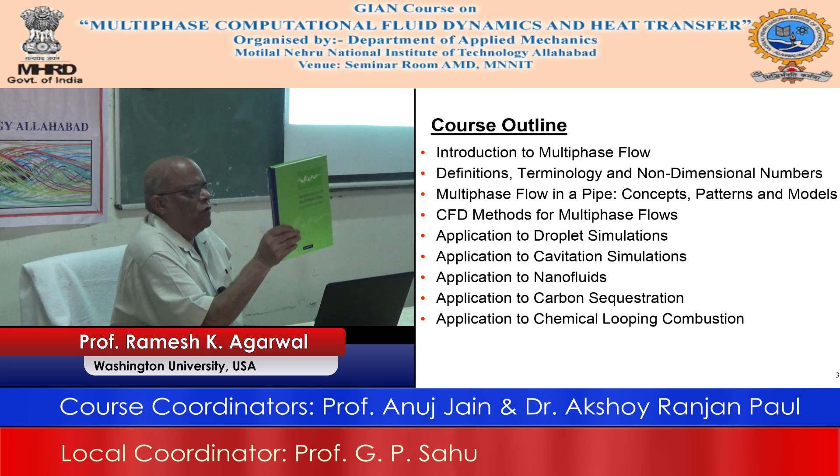Okay, so Christopher Brennen, he is a famous person from Caltech, and I think he retired many years ago. But this is the book. One thing I want to caution you is that if you want to learn about droplets, this is the best book, and if you want to give a course in droplets, this is a very good book. But if you want to learn level set, it does not have it.

And also if you want to learn about other things, which I think many of you may be interested in, and we will talk about that, the next application is cavitation. Cavitation is a very important phenomenon.

I want to know how many of you have heard of cavitation. So, quite a few of you have heard of cavitation.

Cavitation occurs in turbo machinery very commonly. There are lubrication devices in mechanical engineering like a hydroviscous device. There are so many places, hydrofoils. So what happens is that cavitation is nothing but the formation of small little bubbles. In turbo machinery, if you have cavitation, it causes erosion, it reduces the efficiency of the turbine, and so cavitation has been something people have worked on for a very long time.

So cavitation has two fluids, two phases. What are those two phases? One is those little gas bubbles, and the second is liquid, and most of the time what liquid is that? Water. Water, primarily water. Now maybe you can have other variations, but this is primarily the case, like in water turbines.

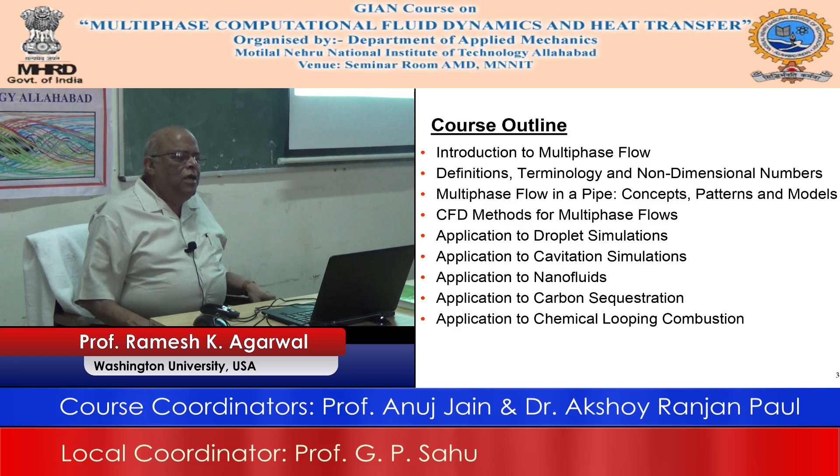So we will try to cover these 9 topics, and as I said, we will skip quite a bit, because the idea here is to give you less information in the presentation, but all the other information, if you want to follow it, you will have in the notes being handed out. On top of that, if you want more information, you can use that and get it from the literature, or you can contact me, because it is not possible to include everything.

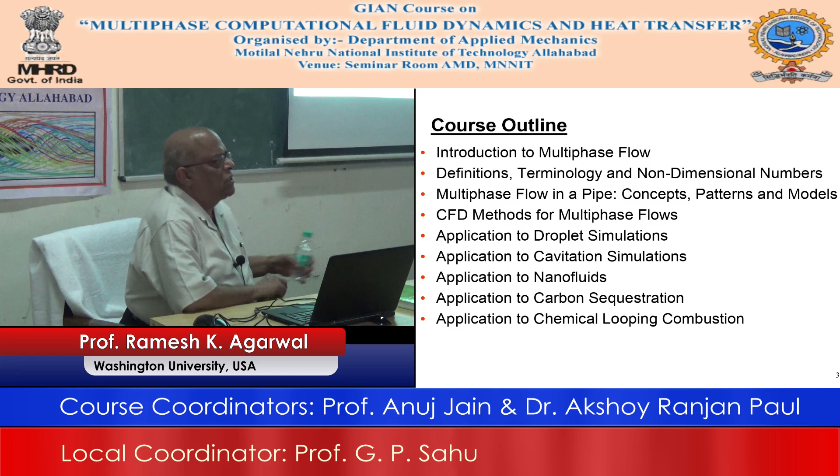But it turns out, luckily, that all the examples I gave you—the majority of the important flows—are two-phase flows. There are very few cases where the flow is relevant to three phases. And I think that is why all the books and other details you have are all about two-phase flows.

Have you come across any book related to the numerics of droplets other than the Fluent user guide? As I said, this fifth topic will have details of the numerics and how you deal with the interface—the level set method, some details of VOF. VOF is part of Fluent, so if you read the Fluent user guide, you can understand VOF, but it does not contain level set.

But once you get the information from here, then afterward if you use the Fluent guide, it will be much more helpful for you to understand that. Any other question or comment?

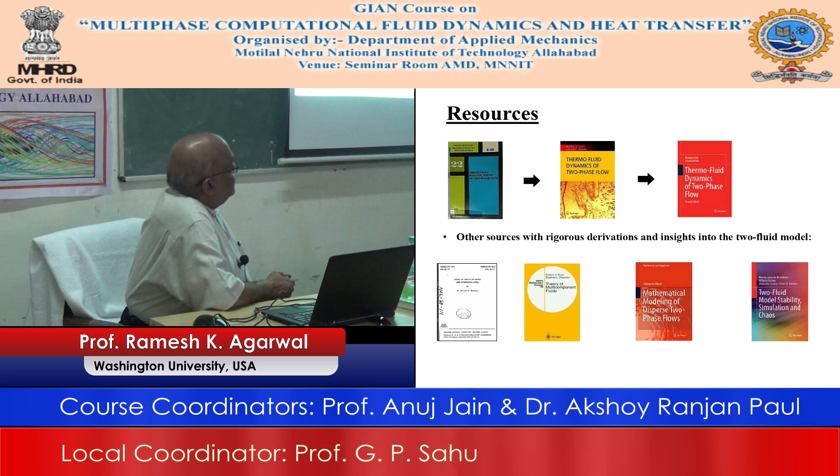Okay, so a lot of these things have the details that I have already discussed, so we can move a little bit faster. So what is a multiphase flow? As I already said, it consists of the other phases of material.

Material basically has two phases and three phases, that is gas, liquid and solid. But what can also happen is that in some problems the phase can change. So if you have initially water and some gas, but because of heat transfer the water can change phase to steam. So initially you may have water and steam, but later on you can have more steam and less water.

So the phase can change, and also it can happen that two phases react with each other. There are miscible liquids, they can mix, but there are immiscible liquids, like oil and water, that never mix. So the phases can change, like if you have salt water, for example the example I gave of sequestration, you have two phases, CO2 which is supercritical, a gaseous phase, then it becomes subcritical, it can turn into a liquid phase, and depending on the heat transfer, all kinds of changes can take place.

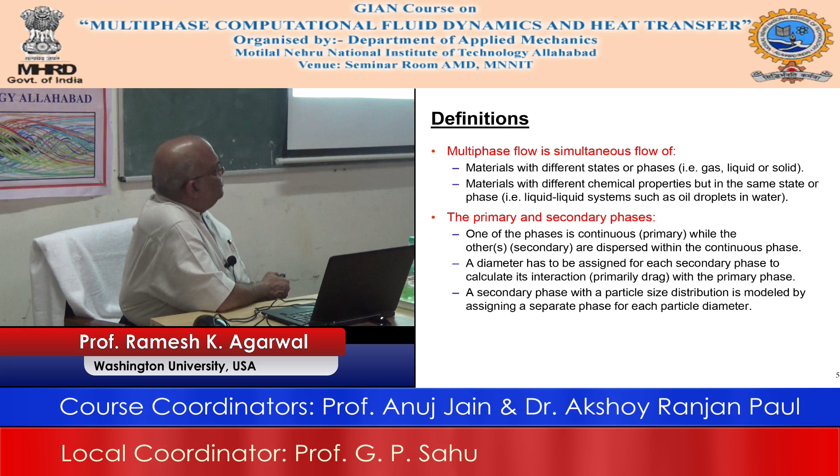Now, as I have already mentioned, because of the method you are going to use, what is the goal of a method, the goal of a physical problem? You want to formulate a physical problem with the simplest possible mathematics. But what is the characteristic of that mathematical formulation? You should capture every physics that you want. So if you can capture the physics of the entire problem in the simplest mathematical model, then you are a genius.

If you capture very simple physics with a very difficult mathematical framework, you are not only not a genius, you are not really applying your common sense. So our idea here is to capture the physics of multiphase flow, the important physics of multiphase flow, with the simplest model, and that is why a few minutes ago we had a discussion.

We said there is a method called DEM, a method called DPM, a method called two fluid model, a Euler-Euler model. Some of you who are more familiar with it, what do those mean? We will go over it. What it means is the status of these phases.

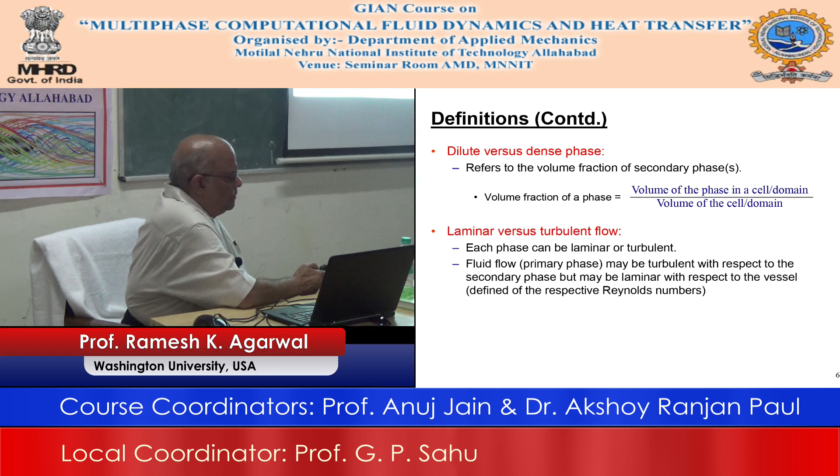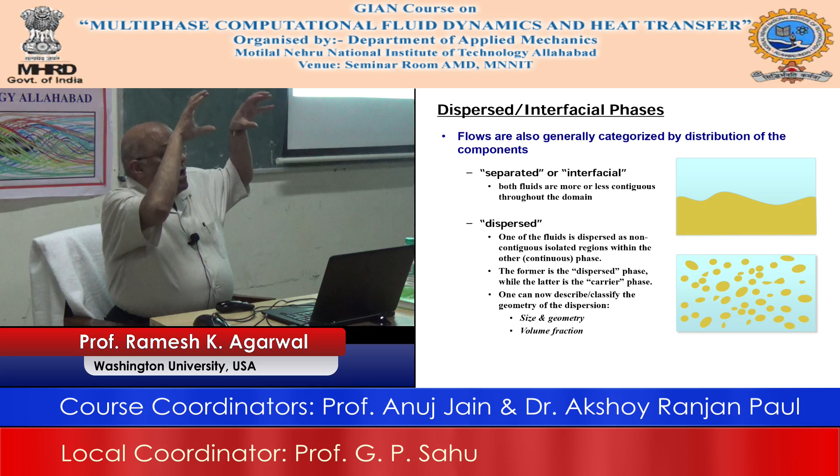You have to apply enough pressure to overcome the friction of those pipes, and those pipes are very rough. So there is a lot of friction, a lot of turbulence, and a lot of multiphase flow - a lot of oil, a lot of air over the oil, all kinds of conditions will be there depending on how much pressure you put in. It is not free - you need almost a very large amount of power to push against the friction of the pipe all the way 2000 miles.

How do you design that? All of you are fluid dynamicists, how do you design that? Same thing - you take a little pipe, put it in your lab, look at the whole analysis: length, diameter, oil, whatever you have, and then apply the Buckingham Pi theorem, whatever you want to apply, to relate that little pipe to the big pipe.

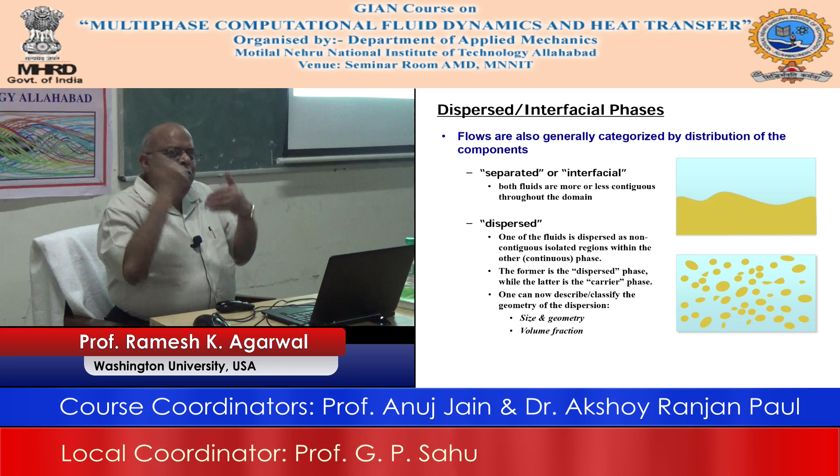We will be doing the same thing here for multiphase flow. There are all kinds of more complex equations that come in, all kinds of more complex parameters that come in. But I am just trying to set a stage for fundamental thinking and ideas, how you take these ideas and extend them to multiphase flow. If you have a flow in a pipe, a simple air or water going inside a pipe, it does not matter if it is a rough pipe, it does not matter if it is a turbulent flow.

There is, what are you going to use to calculate the friction loss? Can anybody tell me from fluid mechanics? If I am asking you that this is the length of the pipe, this is the diameter of the pipe, this is the flow velocity, and this is the roughness, I want you to tell me in 5 minutes what will be the friction loss.

Using Moody's chart can be started. Okay, what is this? Anybody else? What equation? Laminar equation, so that is generally called Hagen-Poiseuille equation. No, no, no, Hagen-Poiseuille, I said it is a turbulent flow. And how do you know that it is Hagen-Poiseuille?

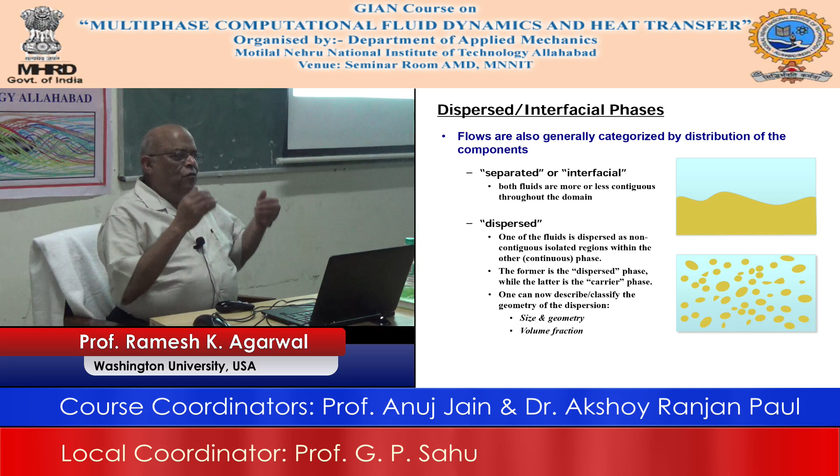People have done theses taking the Moody chart and coming up with analytical equations like the Colebrook equation and some other ones. The goal in multiphase flow is, and people are struggling to come up with a Moody chart. As I will show you, these flows, even two-phase flows, are so complicated that there is no Moody chart for that. So you take my word for it - if you go home and come up with a Moody chart, you will become a famous man, all right.

So I don't know what your name is, but you are from VIT, so it will become a VIT chart, right. So the point I am making is that all these things you already know should be dealt with in the context of multiphase flow, and it becomes so complicated - the applications become so complicated, from bubbles to very strange flows like slurries and all kinds of things - that as you will see, it is a very rich area for a lot of research to do.

But I want you to remember these things which are important, not the rest of it. What is a dispersed phase, what is an interfacial or free surface flow, what is monodisperse, and how you deal with complexity. In a multiphase flow, one of the very important factors is how do you deal with the complexity - how do you simplify the problem so that you can do it even in today's modern computers and get good answers.

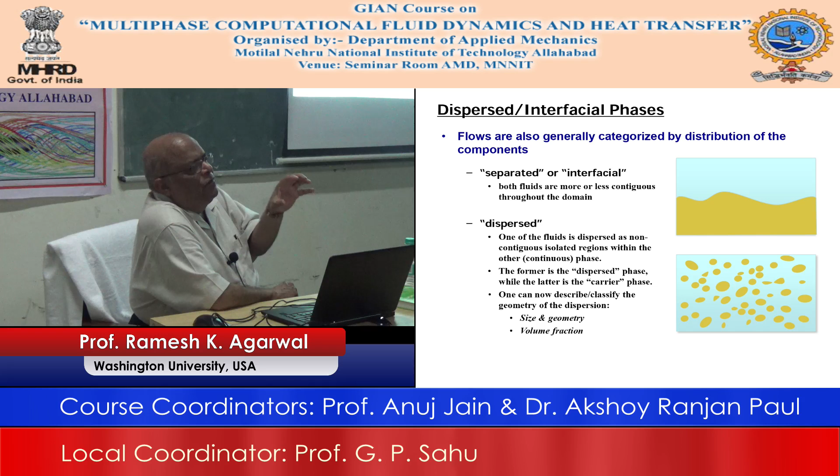So the first idea is how to simplify the physics to the essential details with the simplest mathematical model, and then the next step is how to solve that mathematical model. And once you have a good handle of that, I think you can do a very good job in solving a problem that is of industrial relevance.

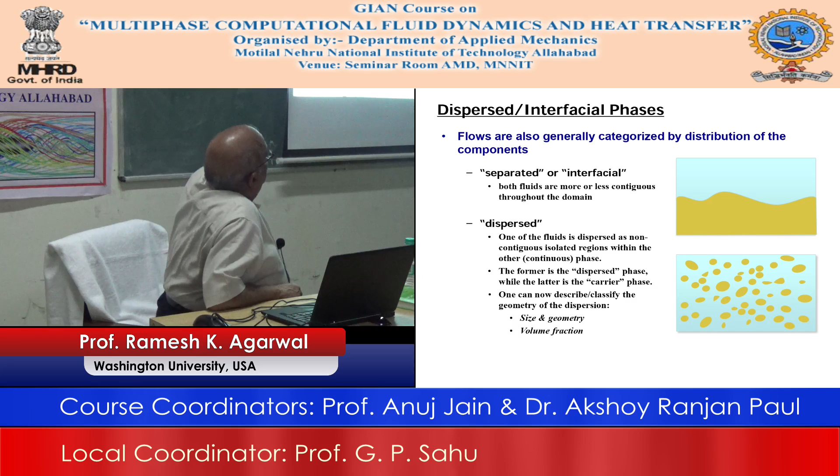Okay, so now I am giving you some more examples. This is an example - you have a mixer, right, you have a mixer. So for example, if you have mango pulp and you are making a milkshake with ice cream, that is a big multiphase flow, all right. And of course, you are not interested in analyzing a multiphase flow when mixing - you are interested in drinking the mango shake, right, you are not interested in all this, let somebody else worry about it.

But I am just giving you this to show that there are a lot of very important problems where multiphase flow becomes important in a practical application. So here I am showing you - geometry is very important.

If you can enhance the mixing by changing the geometry, that is your goal. You can do an experiment to evaluate the mixing of the particle with the main fluid, and that is what is required in combustion, and in many other industrial devices. Even in a fluidized bed you may require that in some cases, so that particles start flowing, not stuck, not agglomerated - they also start flowing with the flow, and that is why we call it fluidization.

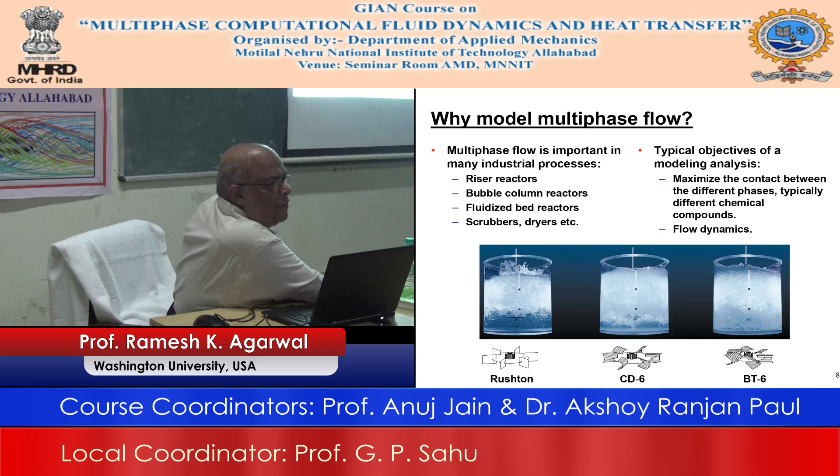What you see here is it rotating at 600 revolutions per minute, 500 revolutions per minute, and 400 revolutions per minute. You can see how the mixing is taking place among all these particles inside this gaseous medium. These are artificial particles, not coal particles, but they basically show you - and there are these color lines that show where the pressure is high and where it becomes low as the rotation is going on.

So you can analyze all these details, but the idea is what method you use here - we use ANSYS along with the discrete element method with the help of the particle or parcel approach, and we will discuss that later.

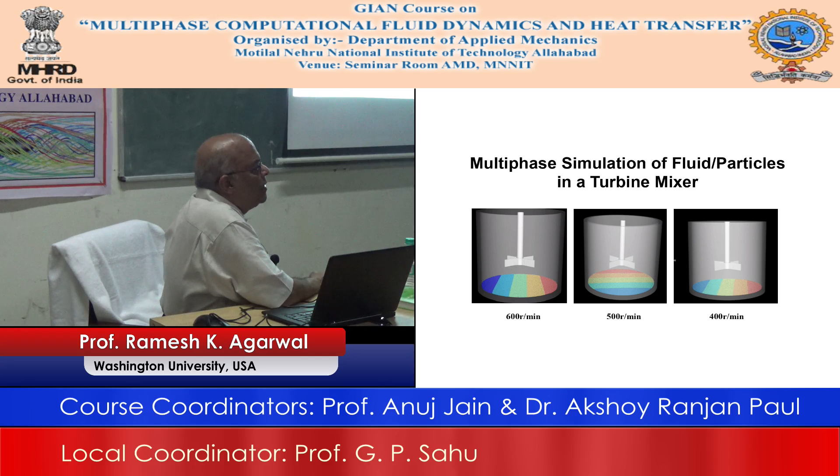Now I will show you how a simple flow in a pipe can have all these patterns. If we had simple air or water in a vertical pipe, and if you look at any book including this one, it will show you that a simple flow of air and water, depending on conditions - and they are all the same size cylinder, same diameter, same size.

What is the thing that is varying here? What is the variable that is varying? So what's varying is two things: one is the inflow velocity, and the other is the volume fraction - meaning how much is the fraction of water versus air.

And of course, one more effect that becomes very important in multiphase flow is the effect of gravity. In a single phase flow, many times if this was air, the effect of gravity will be nothing. If it's water, some. In multiphase flow it's a lot. So the effect of gravity - whether it's a horizontal pipe or a vertical pipe - in a horizontal pipe the effect of gravity is very minimal, but in a vertical pipe it's a very important factor in multiphase flow.

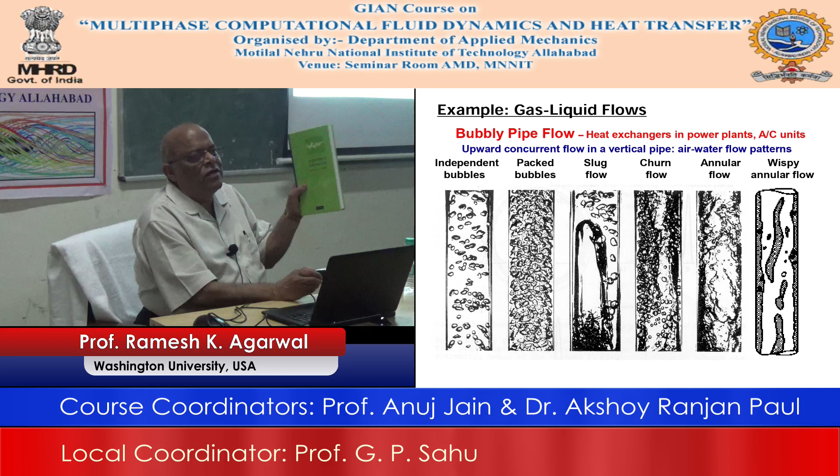And so if you look at this book, it has correlations, empirical relations, all kinds of experimental data, and that is all it has. It does not talk about how to do it numerically. Now we have the numerical tools to do these simulations, but even with the numerical tools we have, it is not easy.

So I am not going to go over it right now. I will do it when we get to bubbles after four or five lectures, because right now if I want to go over what kind of tool is used for each case, first of all I cannot tell you exactly that it will work in all cases, but at least I can give you some idea of what will work. We will do it when we come to that stage.

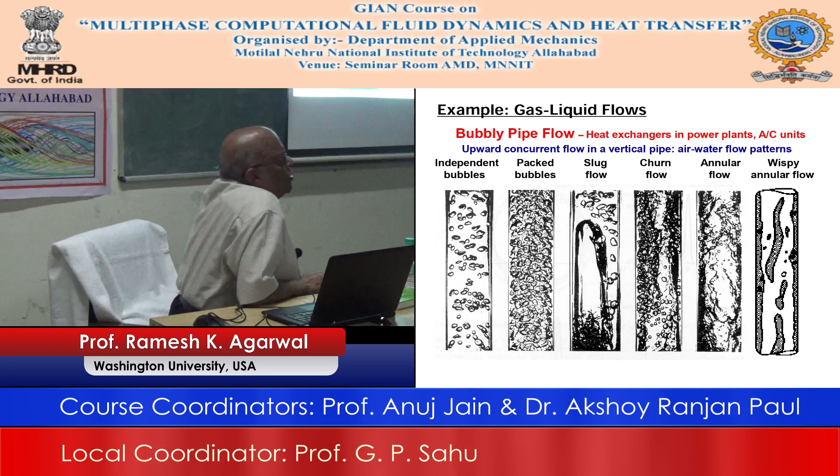And so now these are some examples in nature. As I said, the whole nature consists of nothing but multi-phase flows. So you have gas liquid flows. You can see that wave formation that I showed you on the ocean, and when the wave breaks, you have multi-phase flow.

So these are all the examples, and I am not going to spend time on it. You can read it as homework, or if you don't want to, you don't have to. You can better watch some movie or something instead.

But luckily your TV will not work. My TV didn't work last night, so it was good actually. I could sleep.

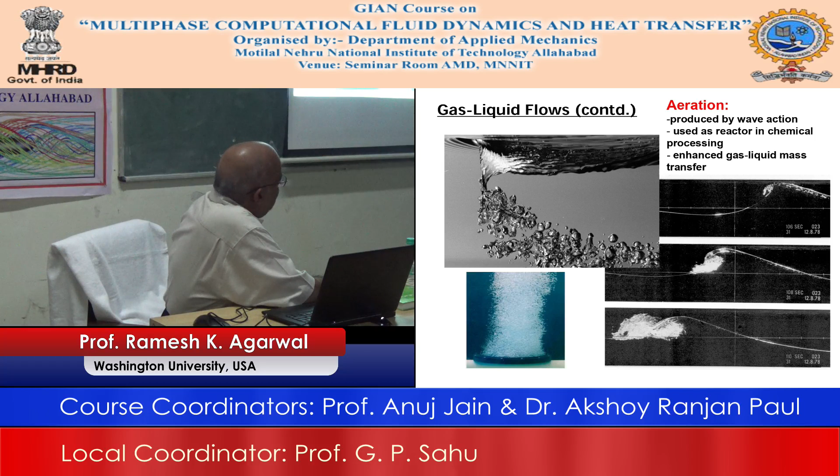Now this is a ship. So here, what kind of bubbles will come?

Your ship, a shape, missile, or any boat - what do you get here? Liquid and air. What kind of flow is that called? It's cavitation. It's similar to turbines.

What happens here is that all these waves you are seeing, very close to the boundary of the ship, create little bubbles, and they are very dangerous because they cause erosion and basically reduce the efficiency because they cause more friction. So it means you require more power to move the ship. So you want to remove cavitation. That is an example of cavitation.

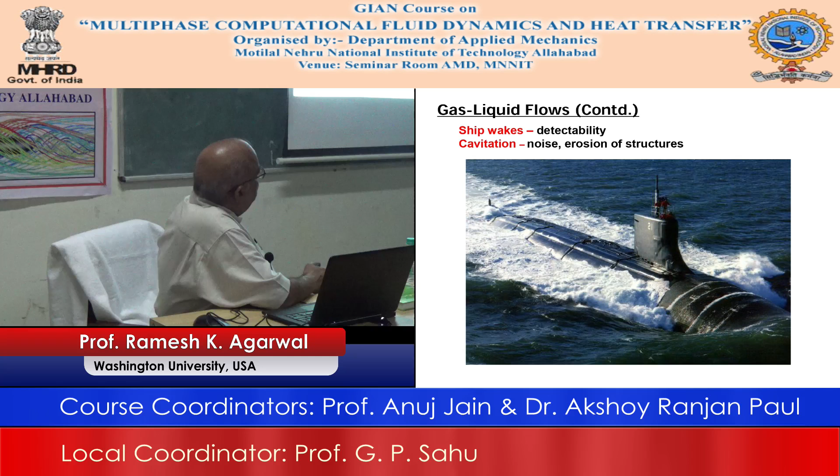and have it impact, it spreads. That phenomenon itself, based on surface tension, is very complicated. I don't know how many of you have seen - you take a water droplet and put it very nicely with the help of some kind of pitot, what they call a pipette tube or something. The shape will be curved like this, so that will look like an acute angle.

But if you take a mercury droplet, the surface tension effect is totally opposite. So it depends on the kind of fluid that you have. The theory of droplets - two droplets hitting each other, a small droplet, a big droplet, energy transfer among the droplets impacting the surface - there are tons and tons of work on droplets.

So I will talk to you, when we discuss droplets, very quickly about what methods to use to study droplets. All the stuff I will show you, you can do with ANSYS Fluent. The only key is that a lot of people in this audience and many others don't know what VOF is, and the level set method is not even included in ANSYS.

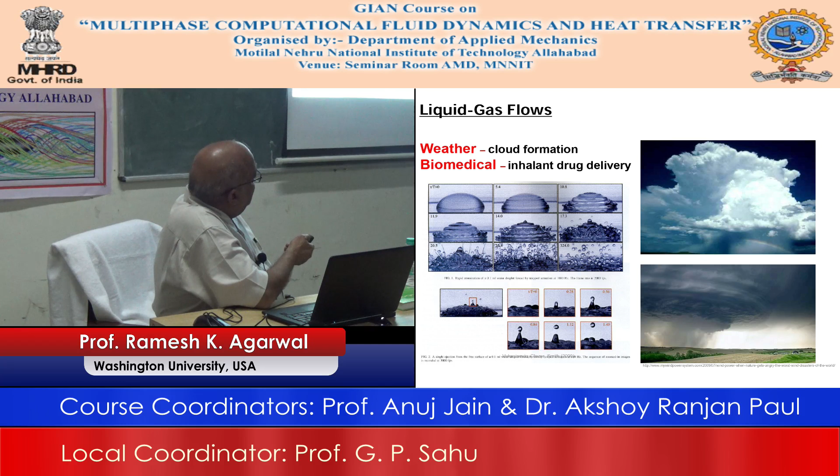So this is again a multi-phase flow with droplets plus air to cause combustion, and these are examples. Now this is a rocket combustion in case of a space shuttle, and you can see again the fuel coming out, whether it's a solid rocket or a liquid rocket. In this case, there is a mixing of air with solid particles, and they combust together to provide this flame which creates thrust.

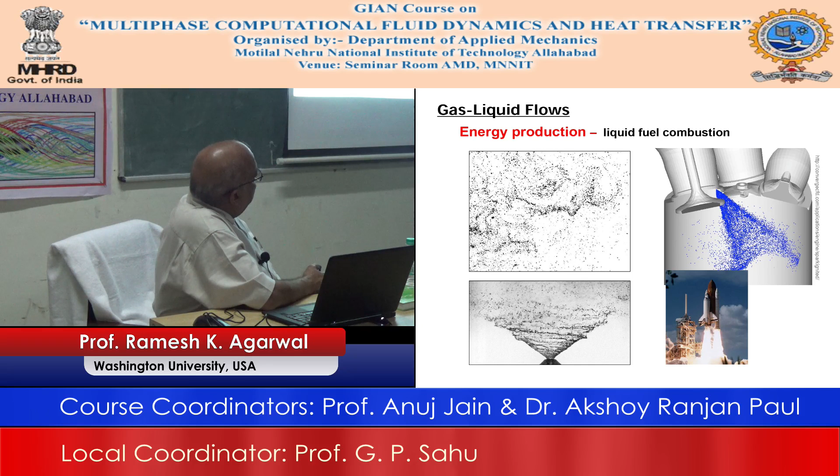So these are examples of energy production or liquid fuel combustion, and again we will come back to what methods to use. These are environmental flows - here you see avalanches, the movement of snow from mountains, and ash plumes from volcanoes. They are all sort of multi-phase flows.

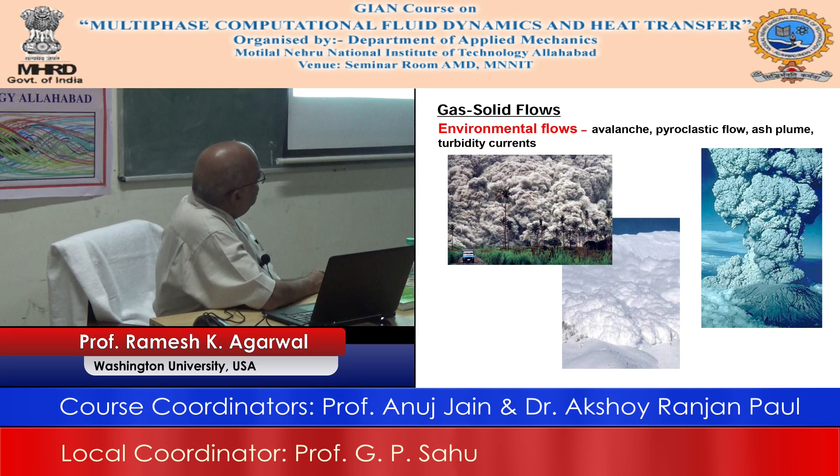Now this is a granular flow - a very good approximation, and we are going to talk about it at length. This is also called the Euler-Euler approximation. These are some other examples of a droplet, and how it changes into the shape of a crown by impingement on the surface. So all these cases just give you an idea of how rich the whole field of multiphase flow is.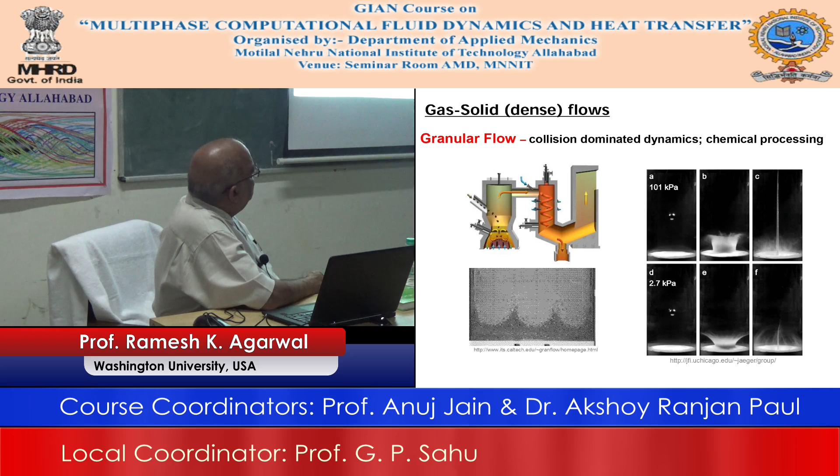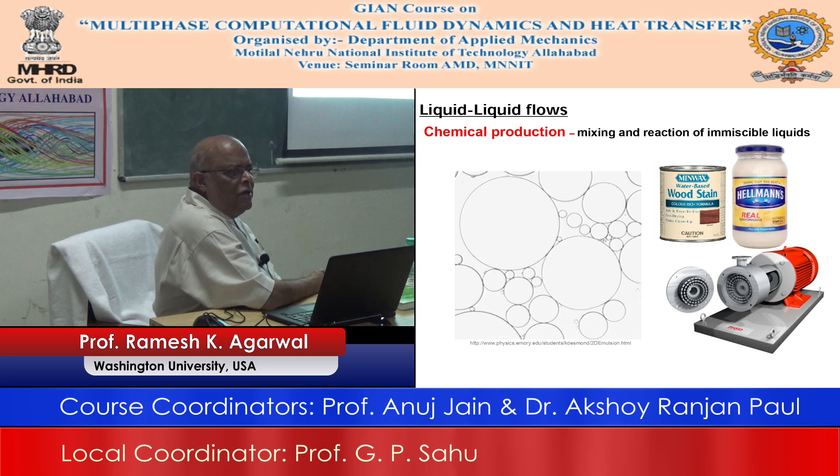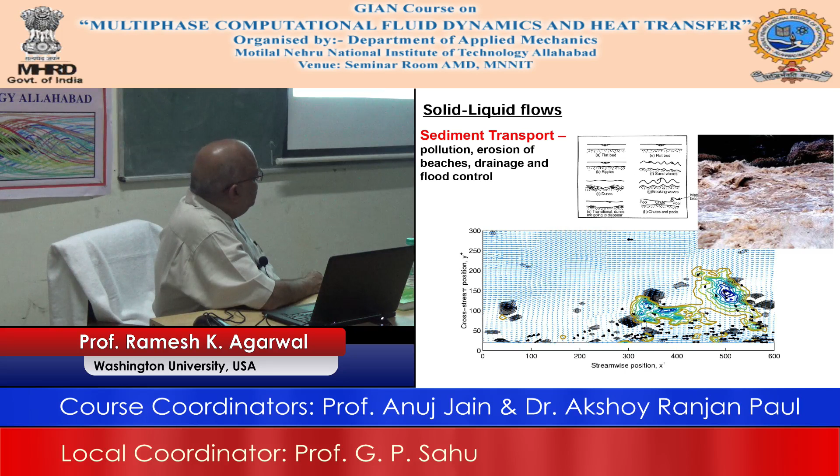Now, this is a solid-liquid flow, and we'll talk about this when we discuss the droplet, how its shape can evolve over time depending on initial conditions. These are interesting problems that occur in sedimentation, when particles settle, or in turbidity currents.

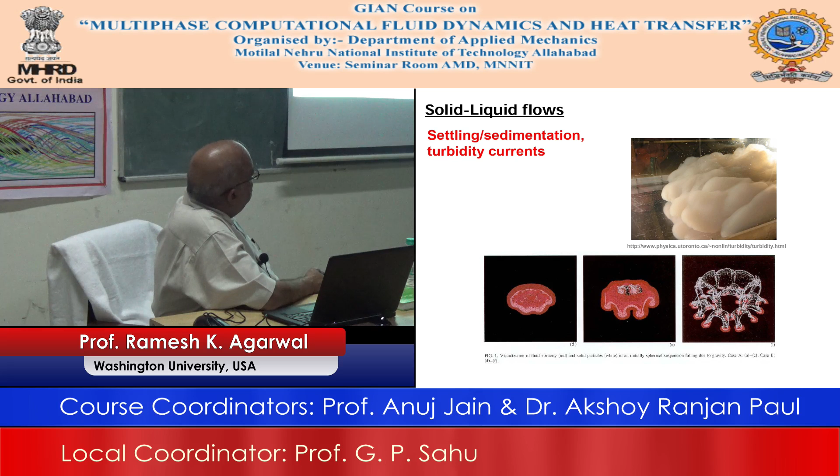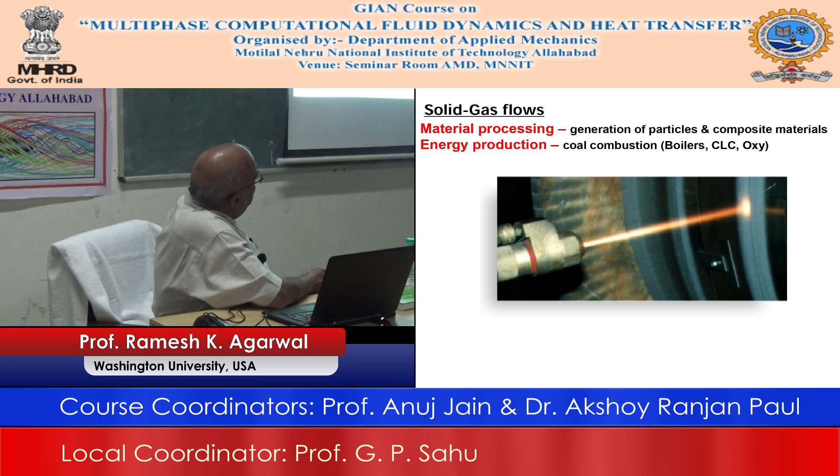These are all examples I'm showing you: material processing, laser systems used in manufacturing, and even with a lathe machine, the little particles that erase themselves. These are all examples of multiphase flow. This is just for your information. Aerosol in the air, pathogens, viruses—they are all multiphase flows.

Now this is an important part. The minimum bubble size for a flow to be classified as slug flow should be at least one-third of the diameter or larger. Then it will form a large bubble, and that is what we call a slug flow.

Now, these are all different names for it. You have little bubbles surrounded by gas. These bubbles can be liquid, then it's called a droplet flow. It can be simple gas bubbles, then it's called bubbly flow, and if solid particles, it's called particle-laden flow. It can be considered a coal particle surrounded by gas or air, a little oil particle or other droplets, or simple bubbles. So different names, but the schematic is the same.

Annular flow—I already told you most of the action is near the wall, so you basically have gas, and most of the liquid close to the wall, like a thin film or a thicker film. So that's annular flow, and this is a free surface flow that I already showed you, the air-water interface.

These are the various types of flows, but they are all characterized by one thing: you have to account for the effect of volume fraction, and account for two phases, liquid or gas, liquid or solid. There are different methods to do this, because you have to take into account whether it is a dilute flow or a dense flow, and whether it is laminar or turbulent.

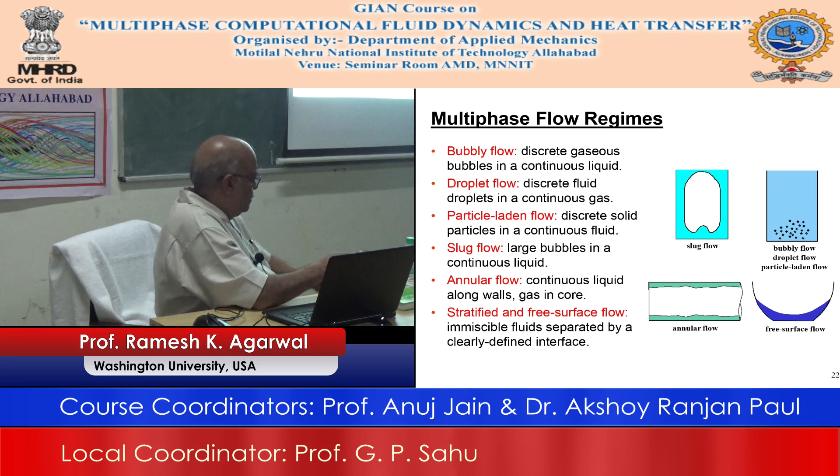Now, we already talked about these things—primary phase, secondary phase, all this we have talked about. Now, how do you approach the modeling?

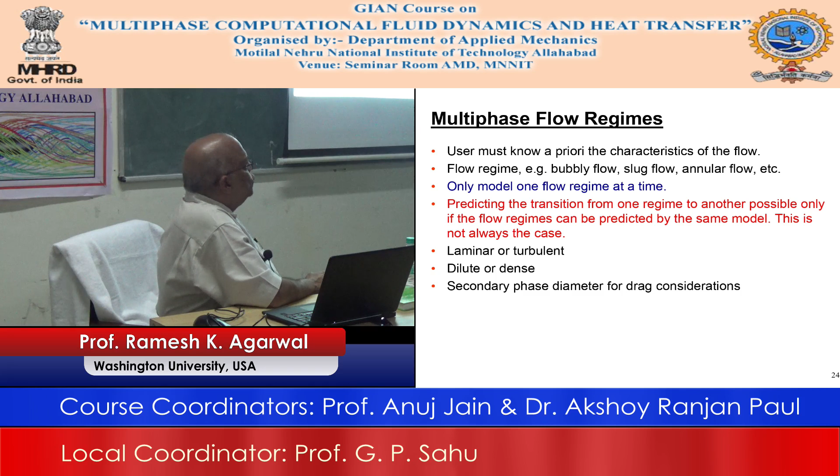From old-fashioned modeling to complicated modeling, the simplest model used to be called the algebraic slip model. These are very simple one-dimensional models in the sense that they have a single momentum equation even in 3 dimensions, instead of having 3 momentum equations, and they are based on area averaging.

Then there is a two-fluid model, also called the Eulerian model, or TFM, two-fluid model, or it also comes in the category of DPPM, and that is the two-phase model.

And now this is a discrete element model, in which you have to chase the particles, and in order to make it computationally feasible, not too difficult, you use the parcel approach or some other technique to do it.

Now, how do you choose this? It depends on what your goal is. If your goal is to get quick, dirty answers but still capture the physics, you use the simplest model. So in some cases the algebraic slip model may be okay, in some cases two-fluid theory is important, sometimes DEM is important. But if you are a teacher, I think you should know all of it. If you are a student, you should know all of it.

If you are a manager or entrepreneur, you do not have to know anything. So you have a clear path, whether you want to be a student, an engineer, a politician, or an entrepreneur—you can decide. None of them come easy; you have to lie a lot, right, to be a good politician. If you are not good at it, you will fail. You have to be corrupt a lot. If you are not good at it, you will fail. So it depends on what your qualities are. None of them is a bad quality, you have to have it, right.

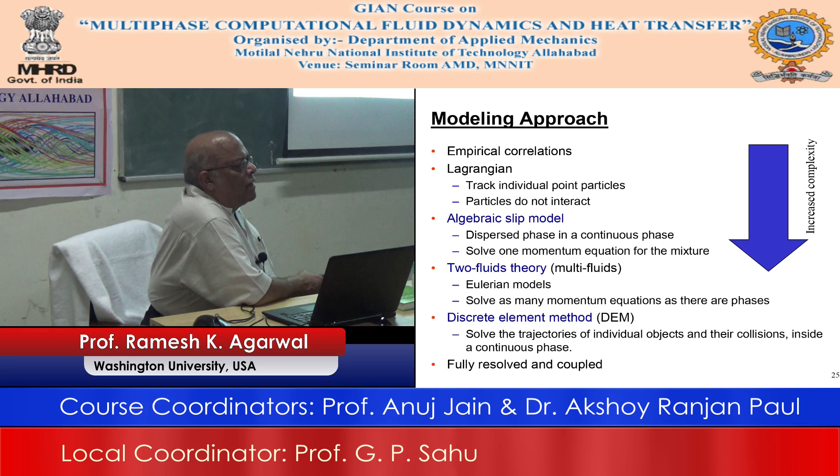Now there are other definitions that are important in terms of the choice of the method. One is called one-way coupling, which means this is very dilute. This bunch of particles are there, but most of it is fluid. It is called one-way coupling, meaning hydrodynamics alone is good enough. When I talk about the nanofluid in lecture number 4, that is a one-way coupling. You put in a few particles, that is good enough.

For example, if you are a magician, you must have seen this: you have a cup of water and they put some black pepper in it. The reason they use black pepper is you can see it. If you put salt, first of all it will melt and you cannot see it, but with black pepper, all the children are looking at it spread, and suddenly the whole thing comes together in the middle.

How does it happen? They put in, when nobody is noticing, some clear liquid drop, very little. Nobody even notices because they are looking at all these balloons and other things that this guy did. What happens is the surface tension between the particles and the rest of the liquid changes by the liquid drop, and as a result all of the black pepper comes together. But if you put in too much black pepper and very little surfactant, then your magic will fail.

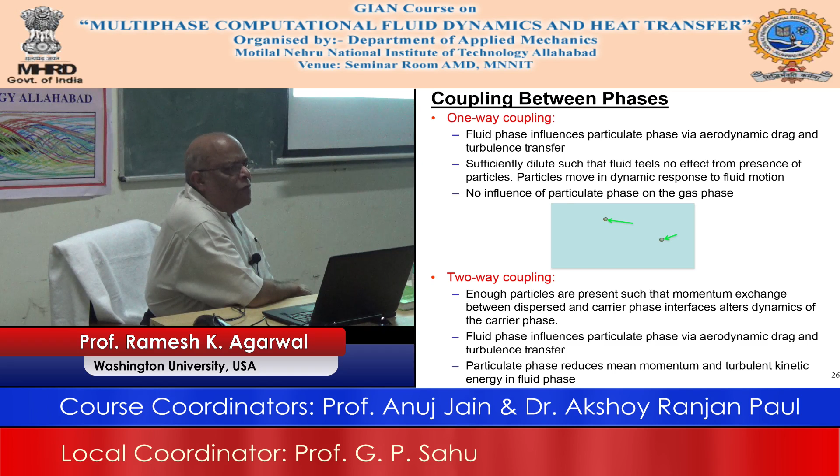So the point I am making is this is called one-way coupling, which means the hydrodynamic model is good enough, and you can almost ignore the effect of the particles. Two-way coupling is when you have a few more particles, so that these particles influence the hydrodynamics and the hydrodynamics influences these particles. The coupling goes both ways: change in the flow changes the forces on these particles and vice versa. That is why it is called two-way coupling.

Then you have four-way coupling, which means not only do these particles influence the hydrodynamics, but they also influence each other, meaning they are fighting with each other. So it becomes four-way coupling: they are fighting among themselves, colliding with each other, and also fighting with the hydrodynamics. For this kind of problem, you have to use a very different method, and the best method is the discrete element approach, or DEM.

You can also do DPPM, which is Euler-Euler. Of course the simple hydrodynamics approach is also there, and if you can ignore the particles, just ignore their existence. But if you want to keep them, you can do it in a very simple way, as I will explain to you in lecture 4.

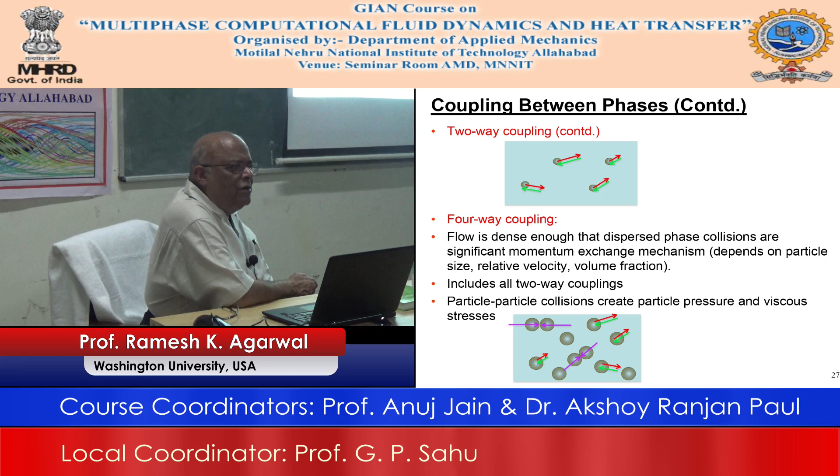There are all these other considerations in a dispersed system, the little particles. As I said, you cannot deal with all kinds of weird shapes, so most of the time we treat these particles as circles or small spheres. You can take the average size of the sphere and lump them together to make the computation smaller. You can also handle particle-particle collisions, dispersion, turbulence, and wall collisions with a good physical model.

And then of course the idea is, what is the heat transfer if you have combustion, what is the mass transfer if the phase is changing, and then of course the composition will change, and if you have reactions, you have some other things to consider.

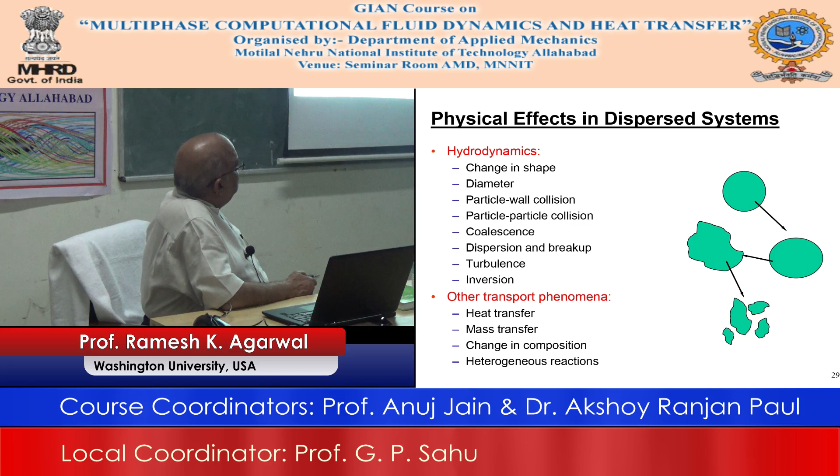We have considered two phases so far. You can add some other phase also, solid 1, solid 2, but most of the time I do not think you should go there—it is just for your information. Most applications do not need three phases. Chemical looping combustion has three phases.

There are reactive flows and all kinds of other flows, but I am sure people can also find some other types of flows where there are two solids. But when you have two solids, they should both be important—it should not be that one is unimportant, in which case you would not have to consider it.

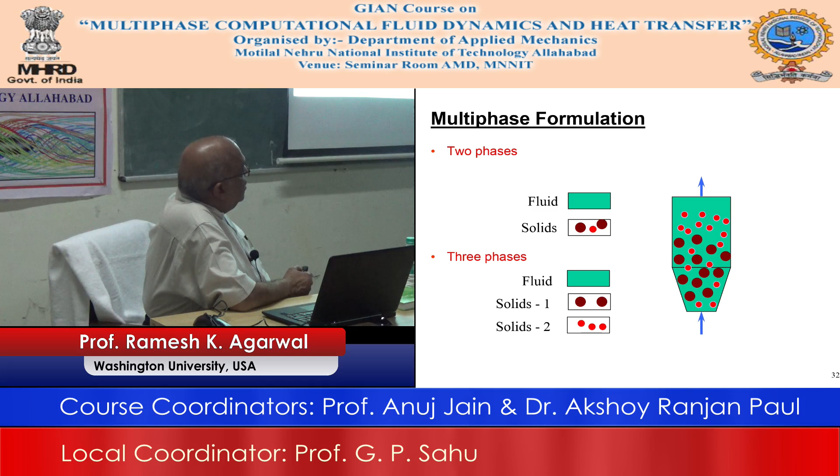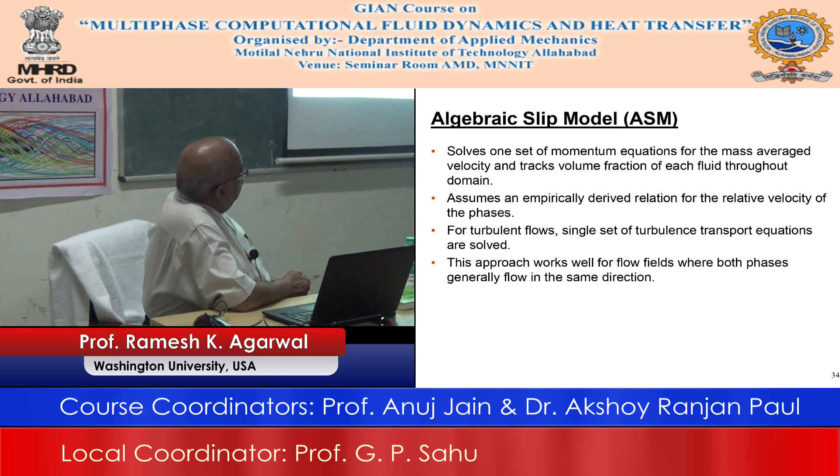So, there is the algebraic slip model, the most simple one. You basically solve a mass average equation for the velocity, and then track the volume fraction, which is an important quantity - the fraction of gas divided by the total volume fraction, meaning the fraction of solid particles in the whole system. There are a lot of empirically derived relations needed, because it is the simplest model. Nobody uses that anymore, even with all the codes we have today, this model does not even exist. This is an old generation model before the advent of new codes and computers, but it basically shows the example of design of a reactor with a simple bubble column.

So you have a liquid, could be water, you pump the gas in, it will sparge or disperse, but you do not have any control over how the bubbles will form, and these bubbles then move, gravity will also act. What will happen is that the character of these bubbles, and also the liquid slurry that you have added, will have a very good mixing to get out. That is the reason you use this kind of bubble column.

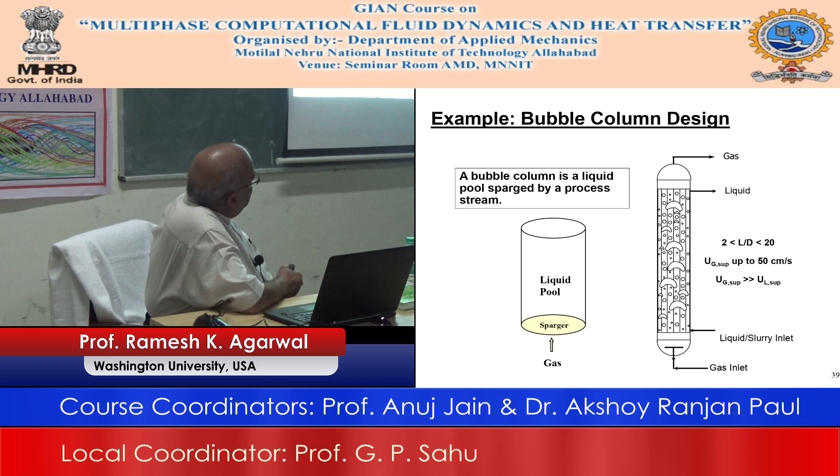Anybody can tell me what is the definition of superficial velocity? Assuming only that particular phase is flowing, what would be the velocity? That is the superficial velocity - it's hypothetical. So if you know the mass of gas, or the volume of gas going into this tube, then the volume of the gas only divided by the area, that is called the superficial velocity of the gas.

If you take the liquid, the liquid has a different velocity. You take the volume of the liquid divided by the total area, that is called the superficial velocity of the liquid. And if you add the two - superficial velocity of the liquid plus superficial velocity of the gas - what does it make? That is the net velocity of the flow.

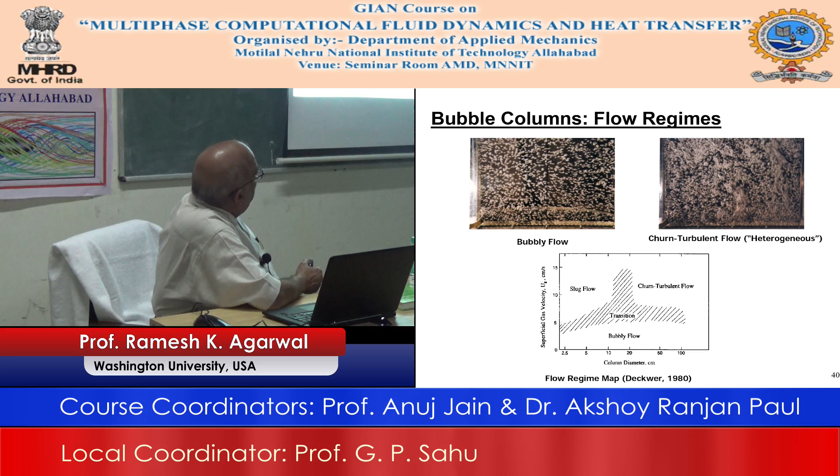Okay, so these are the various parameters that I showed you. The interesting thing you find is that you see A, B, C, D, etc. These are the exponents you can determine exactly by using the Buckingham Pi theorem. So mass transfer, gas hold up, etc., you can go over and do it if you know the basic fluid mechanics.

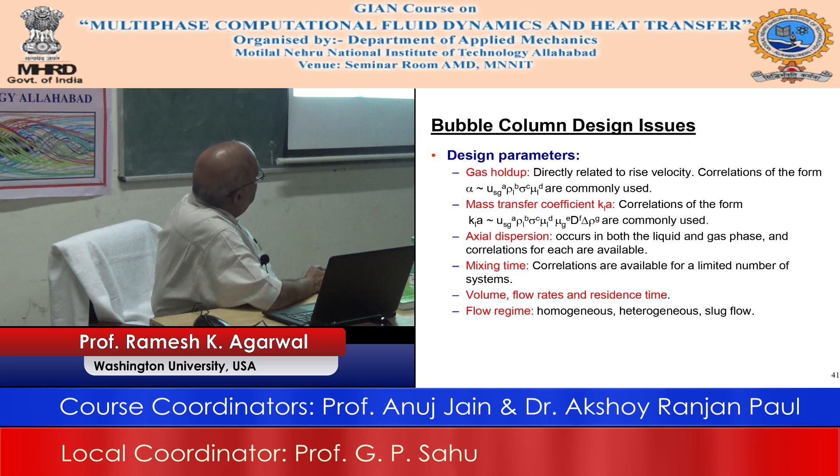There are some issues mentioned here, I do not think they are worth spending time on. Then you can design the bubble column by using the simplest model called the algebraic slip model, in which you have only one momentum equation and one continuity equation, that is it.

So how do you apply a one dimensional momentum equation? You have to have area averaging, and area averaging will allow you to apply the one dimensional equation. You do not get a bad answer. You can do it nowadays in 5 minutes on the computer. Because what is the continuity equation in this case? Tell me.

What is the mass conservation equation for this column? Simplest mass conservation equation, without any code or nothing, just the simple one, back of the envelope, 1 minute. What is the equation? You are more complicated. Rho is the density, u is the velocity, area of cross section must be constant. That is it, you are done, finished.

And what is the momentum equation? Momentum equation is rho u square is momentum, momentum in and momentum out. And what are the forces? The pressure in and pressure out times the area, and the gravity. You can neglect the viscous forces, but if you want to keep it, you can model that too. There is a friction law based on the turbulent flow, and there is a friction law based on the laminar flow. Whatever is suitable, you are done, finished, and you will get this answer.

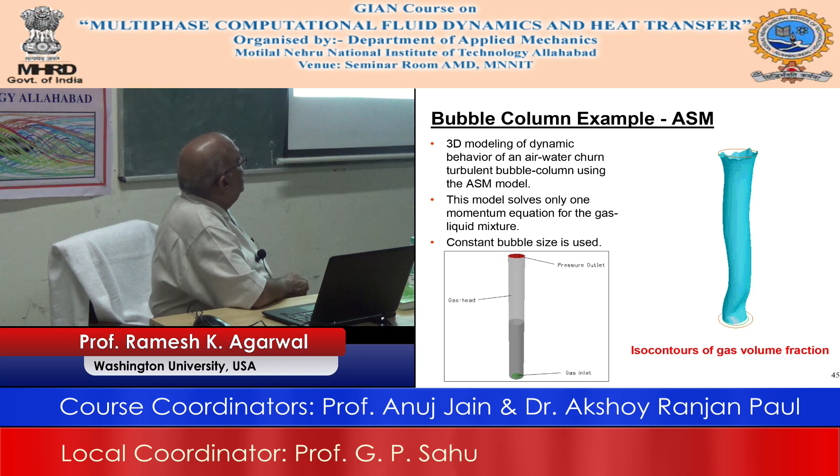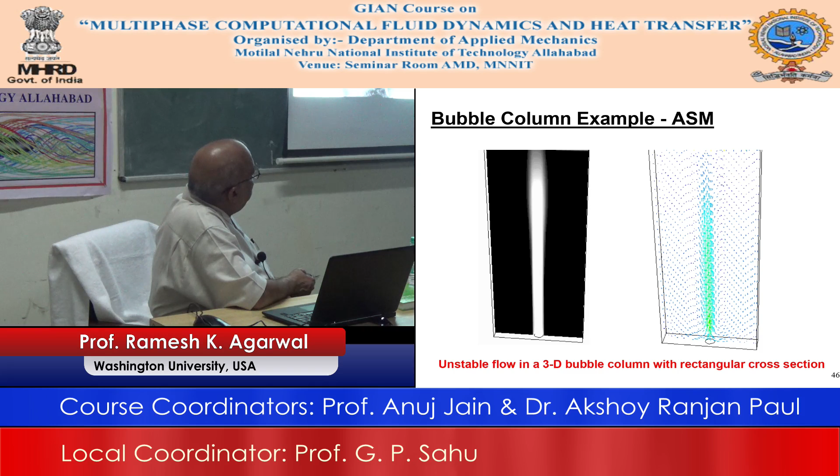Okay, so this is another example. This video is not working unfortunately. So this shows all these bubbles, and this is again the one video I already showed you, the mixing, and this is a Eulerian case. This is animation actually, and this morning I was trying, I do not know why it is not working.

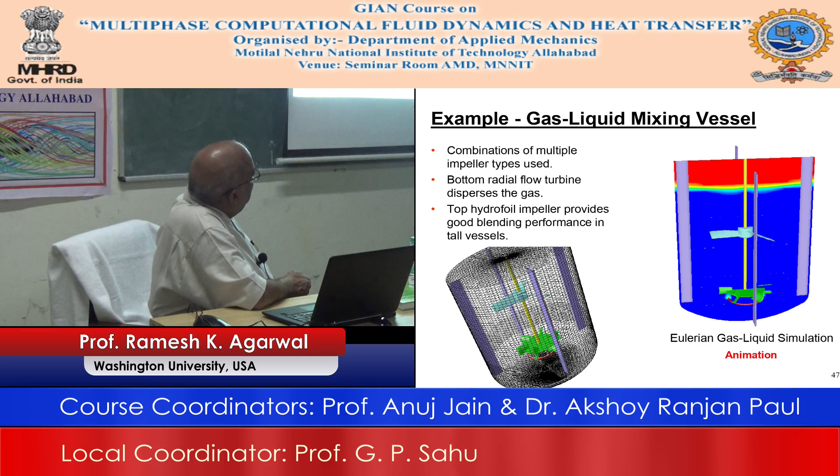All right, so now if you use the Eulerian approach or two fluid method, if you go into very deep physics, anybody a physicist here? Okay, so you must have heard the kinetic theory of gases. This is based on the kinetic theory of granular flow, and then once you take the kinetic theory of granular flow and apply the Boltzmann equation and use the moment method, you get the continuum equations, and then what you get is a Eulerian formulation. So what I have said, have you understood that?

You must have heard of the Boltzmann equation, right? As a physicist, you must know the Boltzmann equation. That is called the mother of all equations. All the good things, we always keep mothers in mind. I have never heard of an equation called the father of all equations. The Boltzmann equation, every equation in physics is derived from the Boltzmann equation. Okay, anyway.

Fluidized beds, risers, pneumatic lines, etc., particle-laden flows, etc., if they are dilute, you can do it by this method, and this is very accurate. This is excellent.

Do not go to DEM at all if it is 10 to 15%. You can stretch it to 20%, but there are certain tricks in it, and I will tell you maybe in the 8th or 9th lecture. That is, if you have a particle-laden flow, the drag law, which now is available from several people who have worked on it. The oldest one is Gidaspow, then Syamlal-O'Brien, and EMMB is the best. You have to have a good drag law to calculate the forces on those particles.

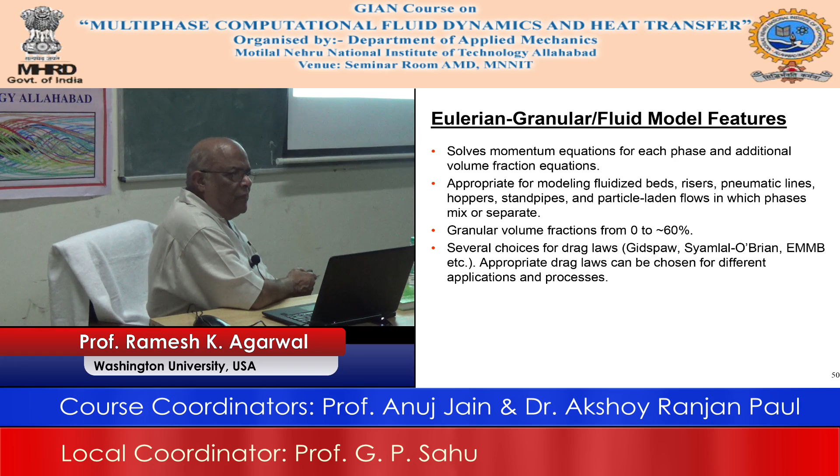Okay, now this fluidized bed, as I said, I am not going to talk about here in detail right now, but we will discuss that in depth, in a big way, because it is a very important part of chemical engineering reactors. It is a very important part of mechanical engineering.

It is a very important part of physics and mathematics and computational science. But the main idea is that you have a column, a cylinder, you have some particles, and you inject some air. And the injection of that air is very important.

It should be, if it is very slightly greater than the fluidization velocity, then you will get a bubbly column. If it is too large, then you may get a very strange column. So you have to have what is called a fluidization velocity, which should be very close to the superficial velocity to get a bubble kind of mixing.

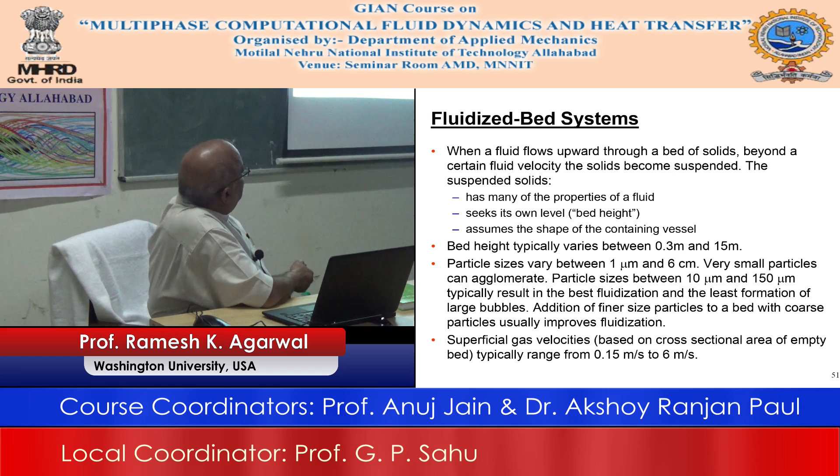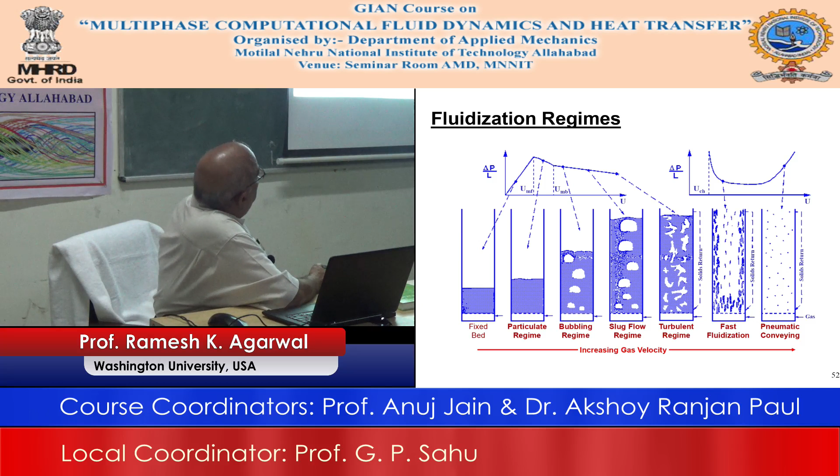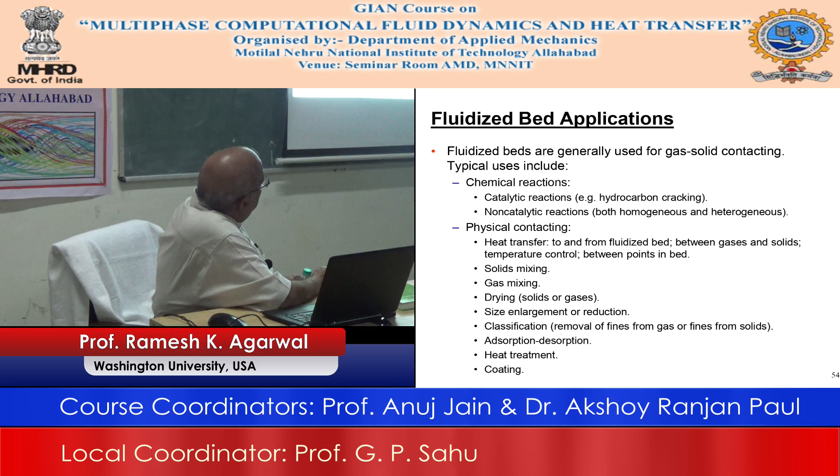This might not be clear at this point, but it will become clear later.

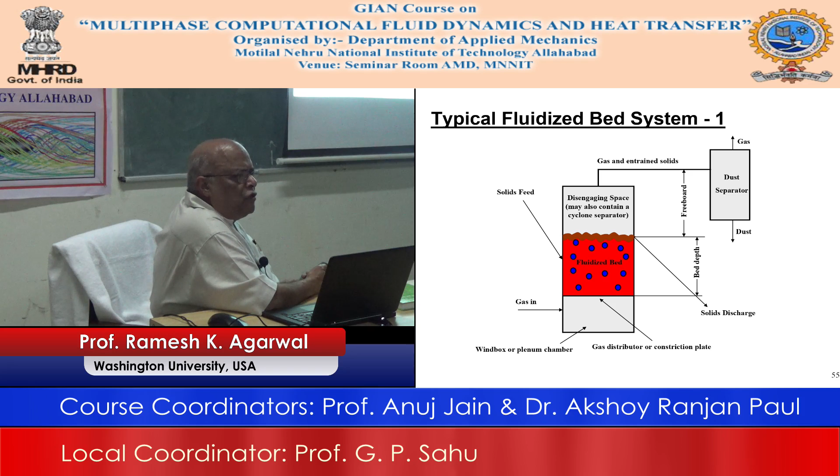These are some design parameters, basically the geometric parameters of L over D, the length and the diameter, and then the superficial velocity, the number of particles. All those things have to be considered, including the effect of turbulence, to really model it and see how well the fluidization will take place, and that will determine how well the combustion will take place, how well the power will be generated, and how much are the emissions from things like CO2.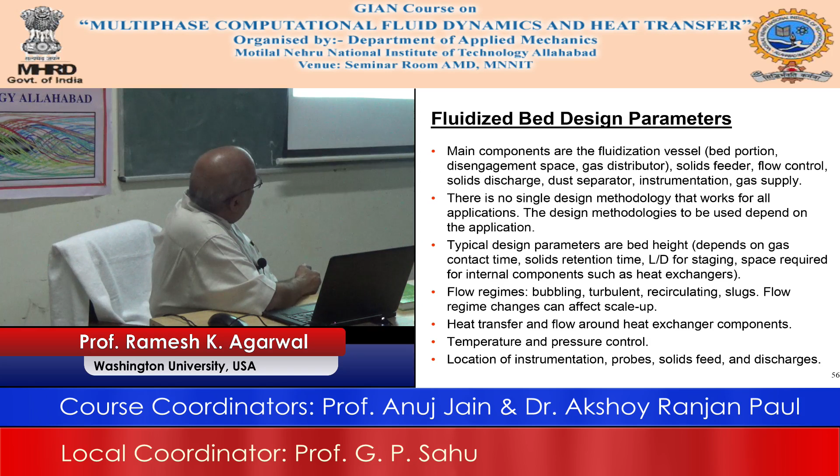This is again where to use CFD. All these things you can do with CFD: expansion, gas flow patterns, bubble size, etc. Once you do the CFD, you will have everything that you want to know, but you have to do it right.

One of the principles of doing CFD that I have always emphasized is you cannot trust the CFD unless you have validated it. You must have either experimental data or some computation from somebody else to know that you have done the CFD right, which means your mesh is right, all the parameters are done right, the boundary conditions are right, and you have reduced the data in the right way. Only then can you trust the CFD.

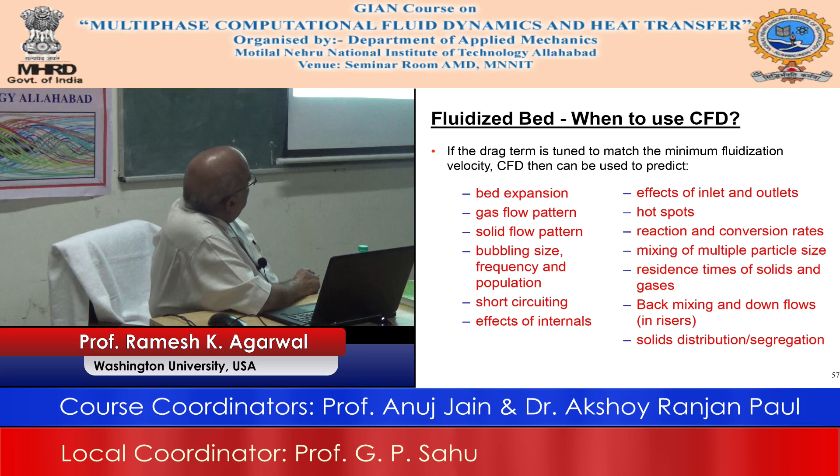What are the parameters that affect the particle shape, which is circular in most cases, particle roughness, which is assumed to be smooth, particle cohesiveness, meaning we will not consider agglomeration, and size distribution, meaning we can use a parcel concept or make a bigger size.

All these effects are lumped into the drag term to make the calculation simple. Otherwise, if you treat everything separately, you are going to be in trouble—meaning a lot of work, that's all. So you want to make the physical model as simple as possible, so that you can get a meaningful answer.

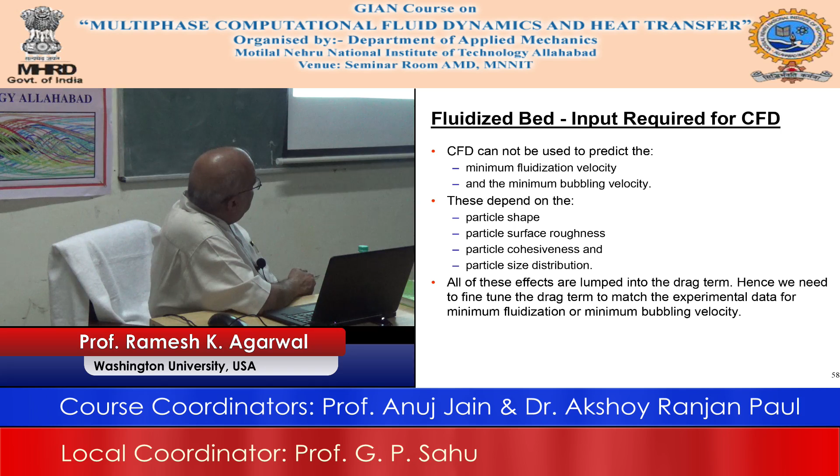This is the animation of a fluidized bed, but it is not working. This is the kind of thing from Fluent where you can see how the bubble formation is taking place, how it spreads.

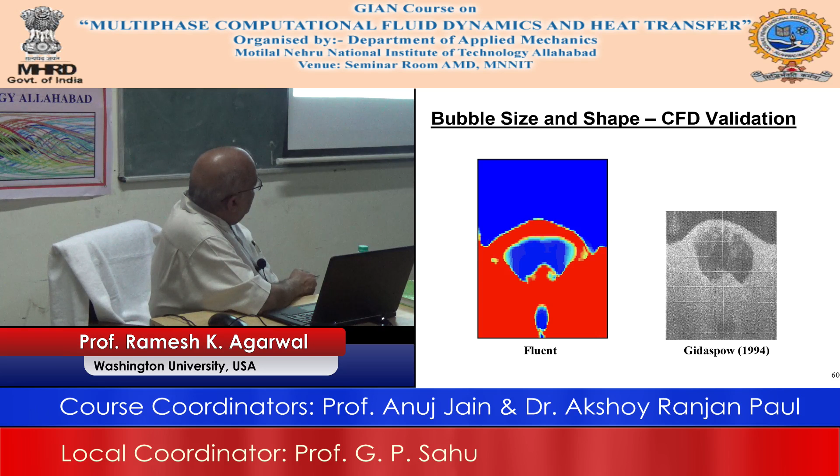This picture was taken in the experiment. You can see that it matches quite well with the photograph—this was taken a long time ago, even before Fluent was available, and it matches well with the cylinder photograph of this particular simulation.

Now this is another system I am showing you, gas-solid, same concept. It creates an annular flow, this is a bubbly flow, and the newest research going on is to include a central jet. If you look at the latest literature in this field, people are doing simulations with a jet, because that allows for better mixing.

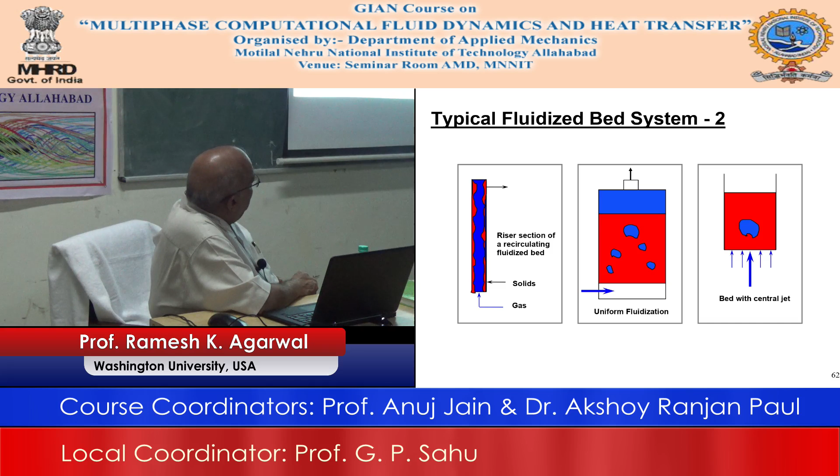This is a single jet versus twin jet, and I will show you some video. This simulation was done by my students—I think this is a double jet, this is a single jet simulation. It has about 150,000 to 160,000 particles, and this was done with a newer code that has come along in the DEM area.

It is called Rocky. Have you heard of Rocky? This is a new code that has actually been developed by the Brazilians. I do not know what the cost is, but the advantage is that you can do this kind of calculation.

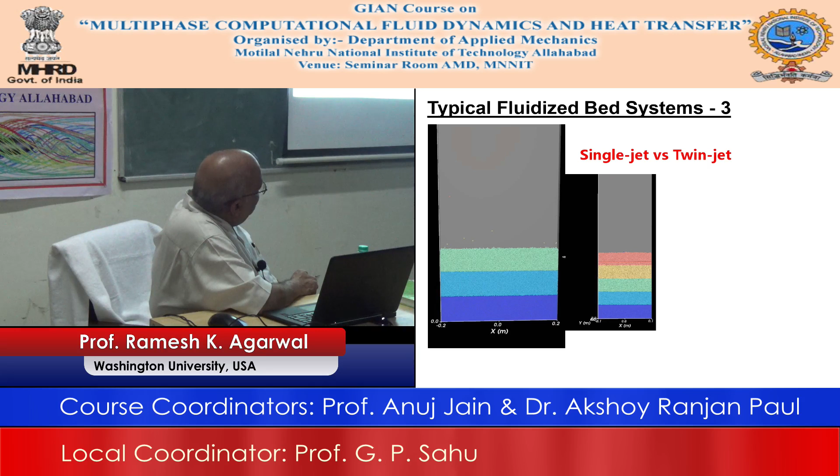See the initial situation and afterwards how the particles behave—this is done on a single jet, and I will show you the video for a double jet.

This is what happens with a double jet. Initially everything is uniform, then you inject the jet—you have two jets, and they keep on growing as time passes, allowing much better mixing of the solid particles with the hydrodynamics. You can do this in Fluent as well. This is doable.

Now this is the video—a two-jet on the left hand side, done with a simulation using Rocky, and that is a single jet; the previous one was the still pictures. You have to only apply the right boundary conditions here. So let us see.

Yeah, it should work. It depends on the flow rate, which starts very small, then increases further, and the last one has the largest flow rate. You can see in a given amount of time how much fluidization is going through this column, where you have a mixture of particles and gas.

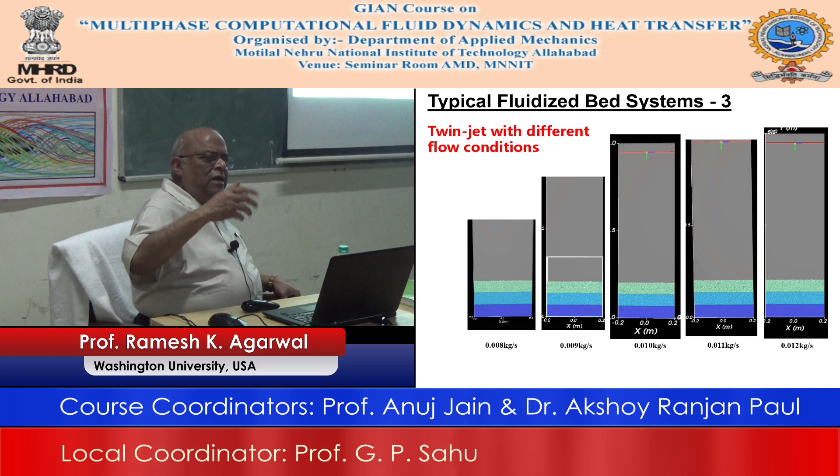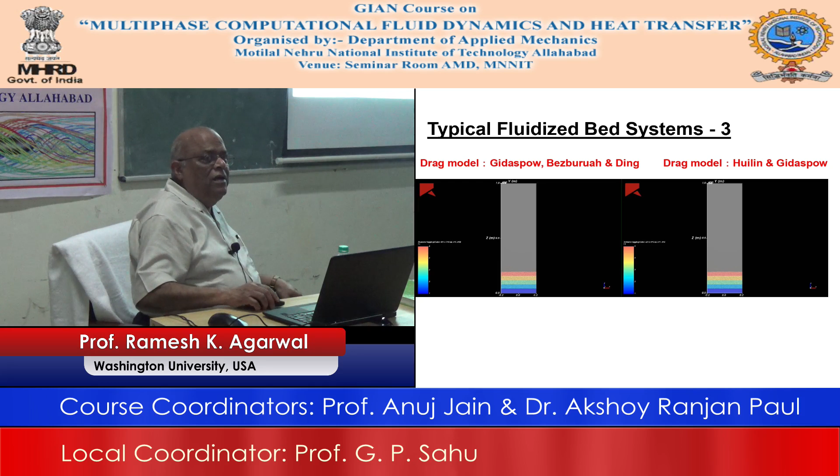So this basically concludes this basic introduction to what the model is, what multiphase flow is, what a dilute suspension is, what turbulent and laminar mean, what various patterns can develop depending on the velocity of injection, what a fluidized bed is, and the effect of mixing with a rotor. All these examples just give you a flavor of what is happening.

In terms of modeling, we already discussed the algebraic slip model, ASM, which nobody is using. It is very simple, you can give it as a homework problem to students. The other models are much more complicated, but they are all built into Fluent or CFX or other codes. There are other completely multiphase flow codes, one called MFIX.

Has anybody heard of MFIX? That is a code that has a lot more capability. There is another code called Barracuda, very expensive, but with a lot of capability. As I said, the Chinese have come up with their own code called Rocky. They are all good at efficiently doing the DEM. For TFM, Eulerian, I think Fluent is good enough.

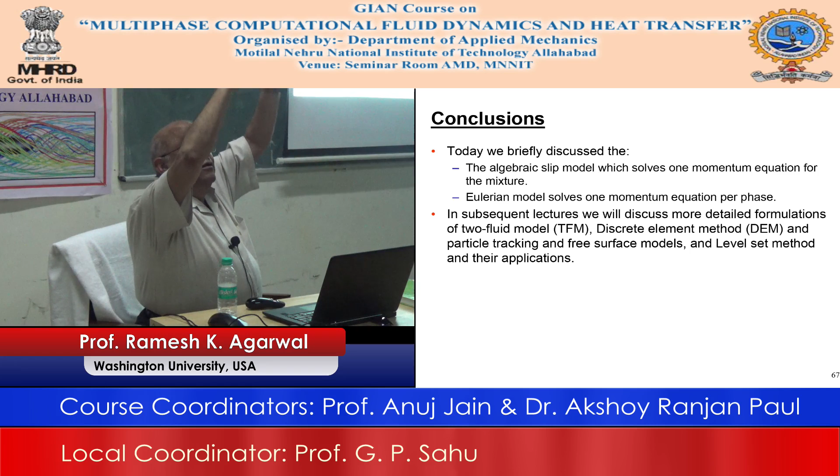So, this CLC, chemical looping combustion, is a new technology. The advantage is that almost no CO2 gets into the atmosphere anymore. In the standard boiler plant, all the particulates and everything go outside and pollute the whole air.

So, you use an oxygen carrier, decomposing into oxygen at 900 degrees, interacting with the coal, creating CO2 plus H2O and nothing else. You take the CO2 away, and the H2O you send to the power plant, which may have a Rankine cycle or whatever heat cycle, generating mechanical power through a gas turbine or whatever turbine you have, and then generate electricity. The CO2 you have captured, you can put underground or use for chemicals. This is what is called chemical looping combustion, a new trend for future power plants, so that you are not polluting the atmosphere and you keep the climate under control.

Now, you have to take everything into account in the modeling. You have to have a reaction, so you put the reactions into the system - they are all there in Fluent.

So Fluent knows that people need it. They have their own experts who keep putting that in, and they rely on people like us. They give us a small change, from which we can buy ice cream, and they say, okay, give an ice cream to your student too and he will do all the job. Then they take all this information and improve it.